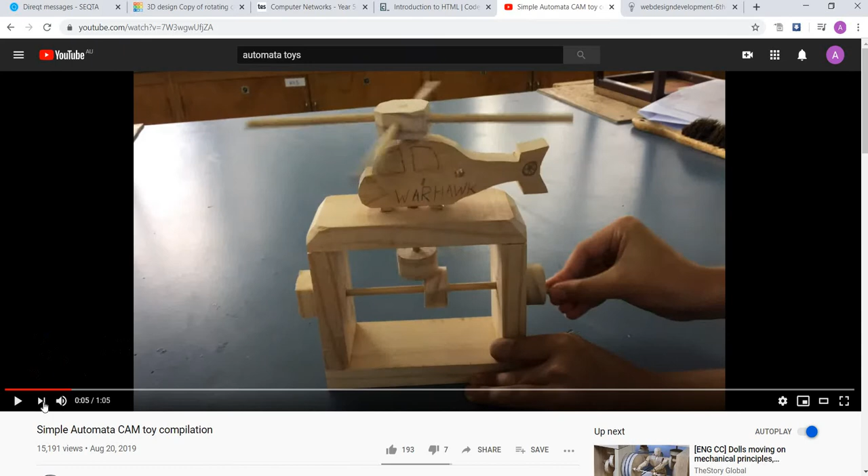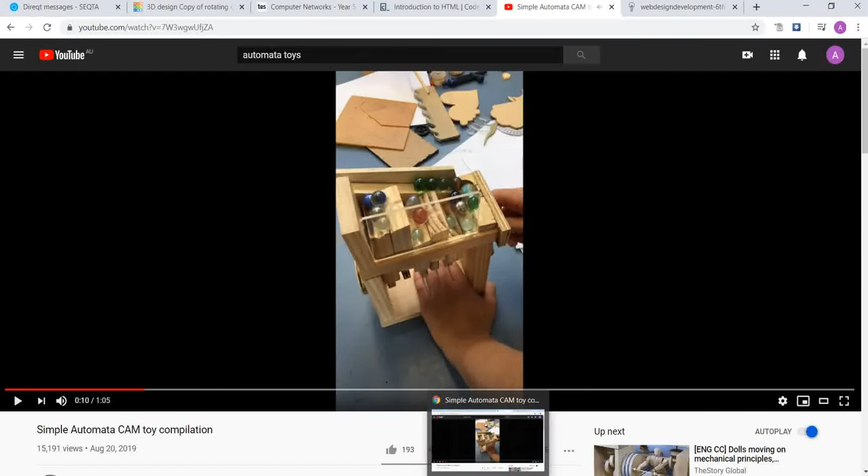This is a follow-up from your previous lesson on creating your cranks for your automata frame. So in this particular tutorial I'm going to show you how to actually create a rotating cam. Okay, the reason why you're going to create a rotating cam is what if you want to make your profile turn something like that. Okay, so look at the cam here. So we are actually going to make the cam and the follower.

So the first thing, you just tinker your crank that you have made from the previous lesson. Open it up, and then same thing, just with the basic shapes. We're going to bring in the cylinder. So the cylinder, we're going to make the size 30 by 30, and we're going to alter the height to 8. Probably make it larger. 40, make it 40 by 40. Okay, so this particular follower here is going to rest on top of your cam over here.

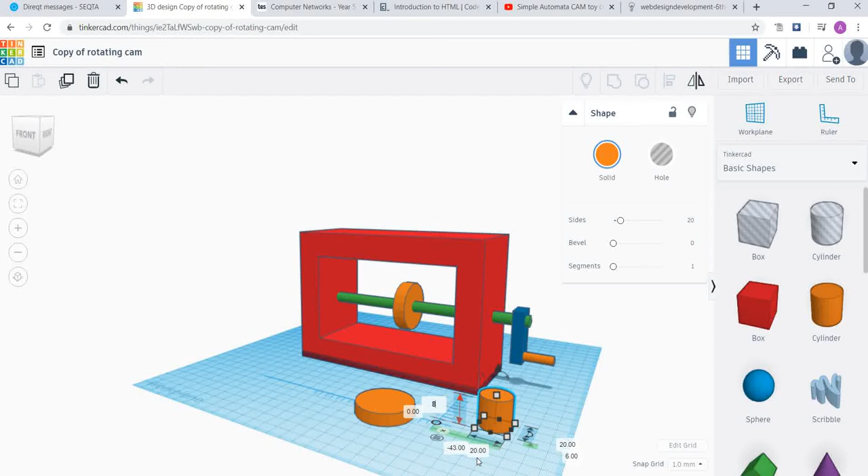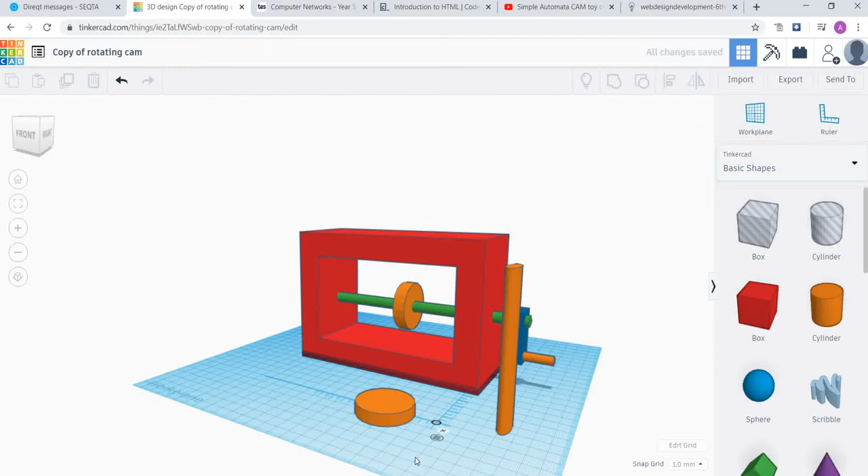So the next thing we're going to do, we're going to put your follower rod that will be rotating while your follower is rotating. So we're going to drag a cylinder again. We're going to change the size of your cylinder diameter to 8. And we're going to change the height to roughly maybe about 100. Okay, so the next step, we're going to actually put your rod to your follower over here.

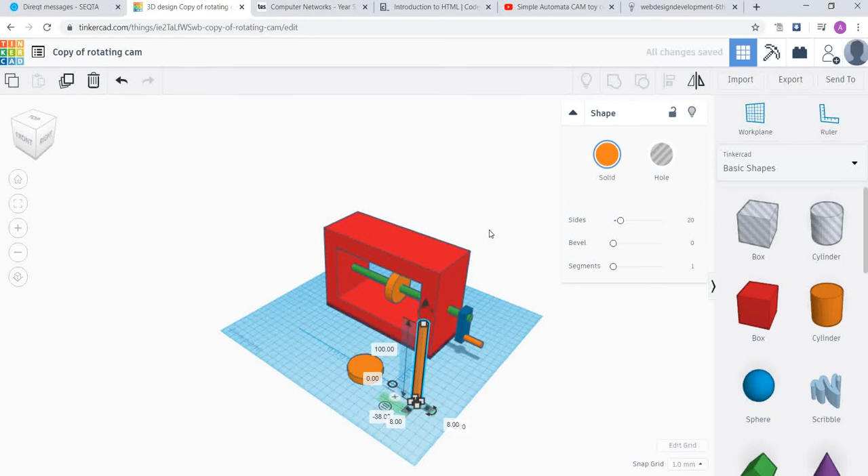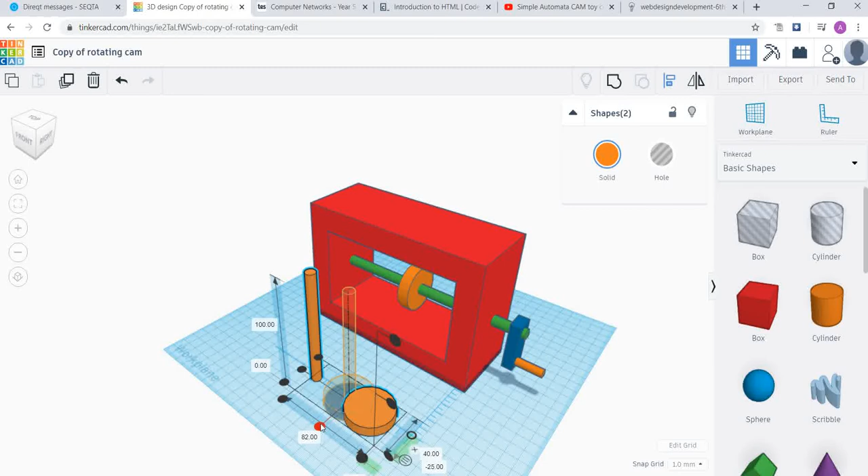Okay, there's two methods that you can actually do it. Oh, I think there's something wrong with the size here. It should be round actually. Yep, that's it. Okay, there's two methods that you can do. You can actually put the rod in somewhere in the middle, or from a previous lesson we can actually align them. So by clicking the rod and this cylinder, we can actually align both of them. So click your align tool. So by just hovering on the black dot, you can actually see what it will look like when they are joined. So we're going to make it center, so they will be aligned together.

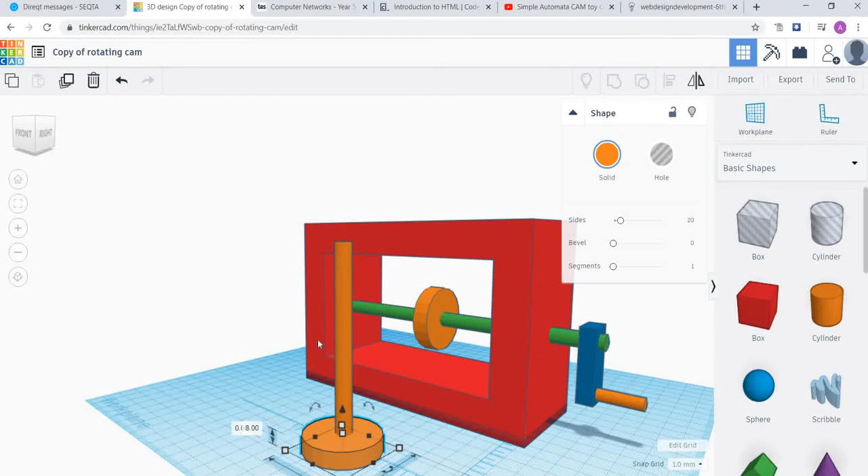So the next step, we're going to actually move this assembly to the top of the cam here. To do that, we need to make your long rod here and the piece of follower here into one piece. So you're going to actually group them, click the rod, and same thing, we group them. I'm going to change the color so we can differentiate. Okay, so now this is actually one piece.

So the next step, we're going to put your whole follower on top of the cam over here. So to do that, we have two methods, right? You can actually raise it and then slowly drag it to the top of the cam, or you can actually find the height of the cam over here. So the height of the cam is actually 40 mil, 28.5 mil and 10, so roughly it's about 78.

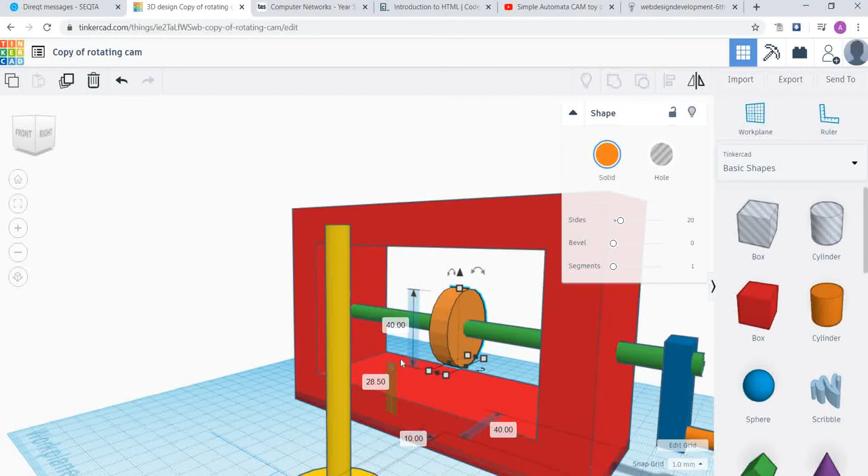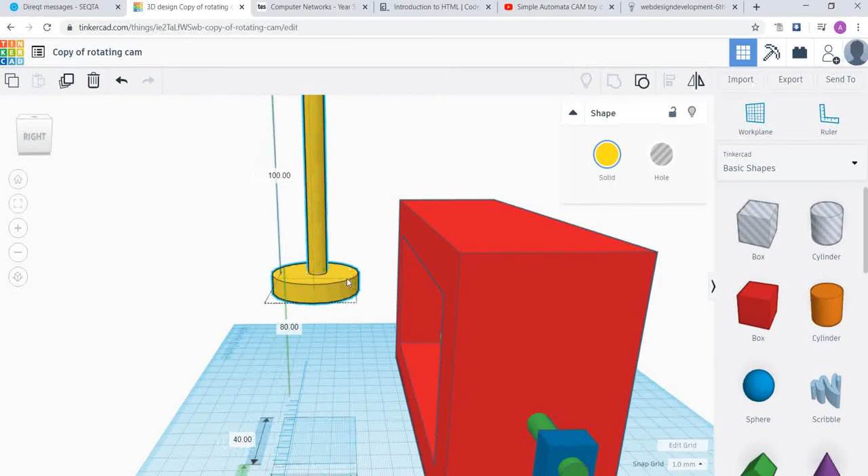So what we're going to do, we're going to set the height there to 80, and then the next step is actually to put it in the cam there. Down a bit. Right. Now, your follower needs to be at the edge of the cam. So when this cam is actually turning, this particular follower will rotate at the same time. So you need to actually push it more to the left side. You can actually use your arrow key on your keypad and just move it.

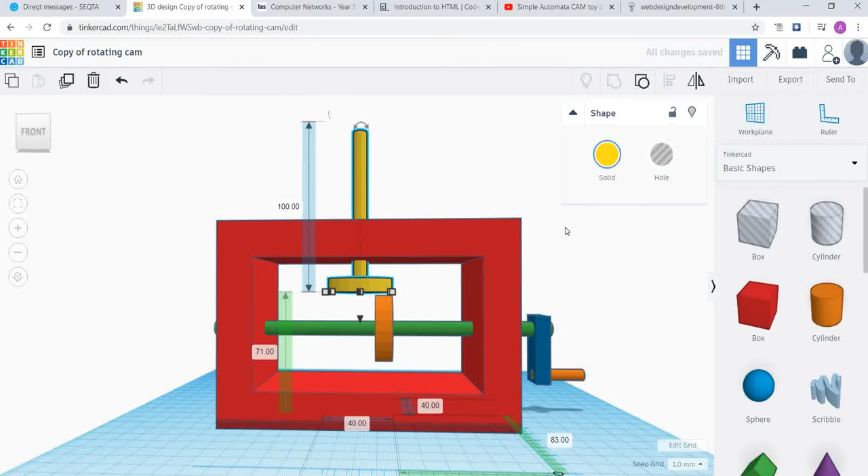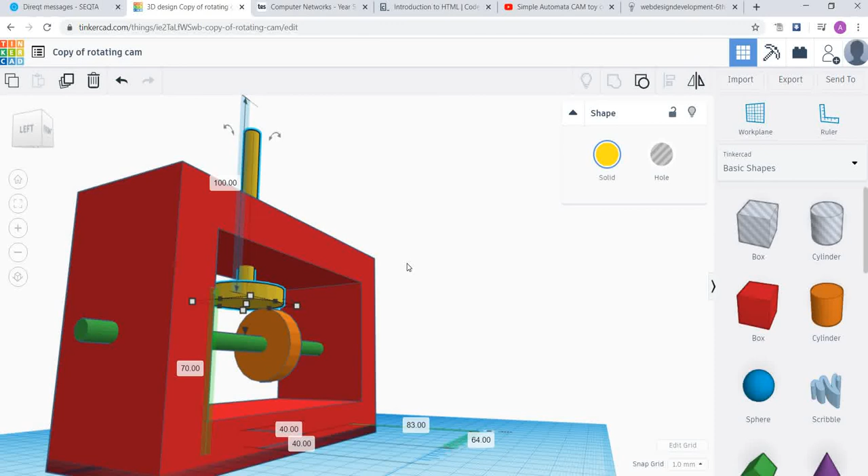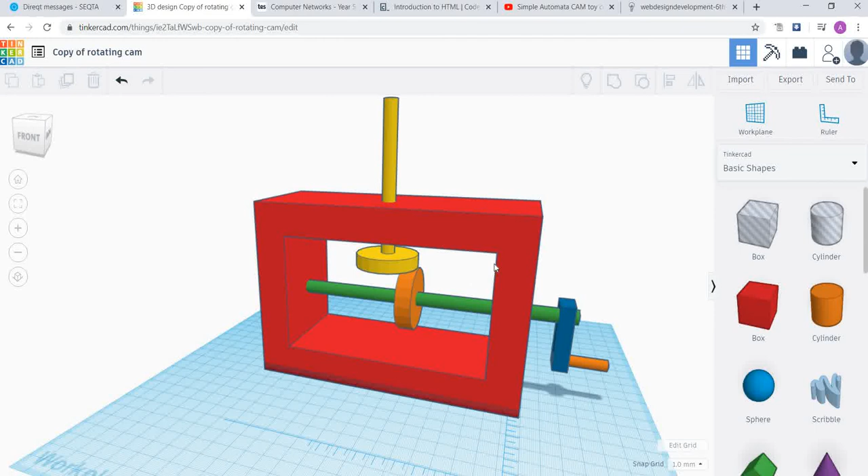Okay. And we're going to have a look, rotate it to see whether this is in line. Yeah. I think we can go a bit more. I think to go a bit more forward. I'm just using my arrow key on the keypad. Alright, so there we go. So we have your rotating cam follower. So every time when you crank it up, when you turn it, this cam will actually turn, and at the same time the follower over here will just rotate. Okay, so this is your first tutorial on making a rotating cam.